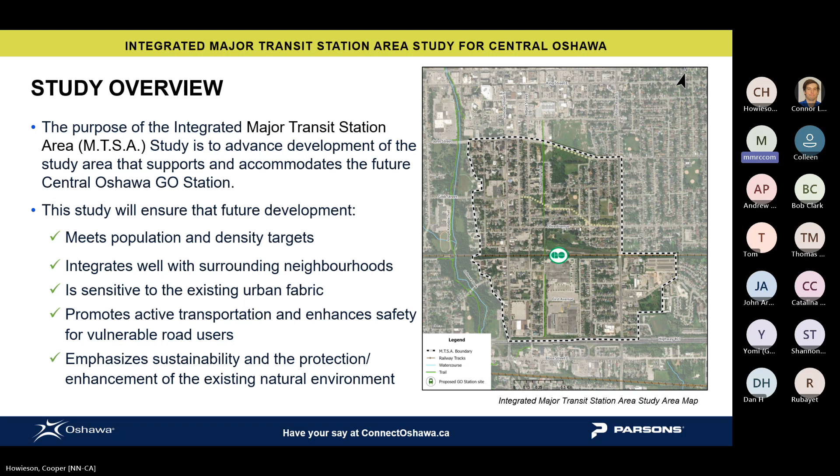The outcome of this study is twofold. We have a master land use and urban design plan that Kieran's going to walk you through in a few slides. Then we have an area specific transportation master plan, which looks at the development traffic that's expected and assigns it to the road network to see where improvements are needed - and not just for cars, but also for active transportation and transit.

We're satisfying a process - it's a paper process where the province has to undertake a class environmental assessment, so we need to follow that process. At the end of all this, the EA goes on public file and there's a 30-day public review period, and you have an opportunity to speak to the city and to the province about what you like and don't like about this plan.

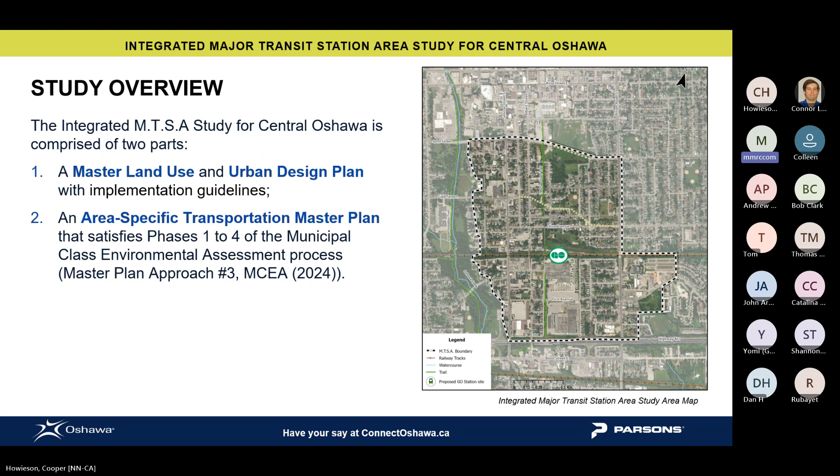A bit of a study timeline - this is where we are, spring of 2024. We're in stage 3, so there have been 2 stages before this. We have one more public information center planned after this, where we will be finalizing the results of the study, hopefully with your input from tonight. Then, as I mentioned, there's a 30-day public review of the environmental assessment master plan report, and eventually things move forward, infrastructure gets built, and development happens.

The purpose of why we're here tonight.

So we're here to talk to you about the land use intensification review and urban design guidelines. We actually have our specialists here tonight, so hopefully that will address some of the concerns that were absent last time. We're going to talk a little bit about First Avenue and Monocton Avenue, which is the roadway that's initially identified for modifications as part of this plan.

Talk about what the options are and how we're going to evaluate that, and also talk about the study timeline, the key dates. We're here to provide an update of the study and the planning process that's been undertaken today, and we're here to listen to your feedback.

I got my fireproof underwear on tonight. I don't know about you, so, but I hope we're all going to be nice and respectful and have a good conversation. Like we said, we understand you look at the map, there's a lot of uncertainty because there's a lot of red and purple splotches, and we're here to kind of walk you through that process.

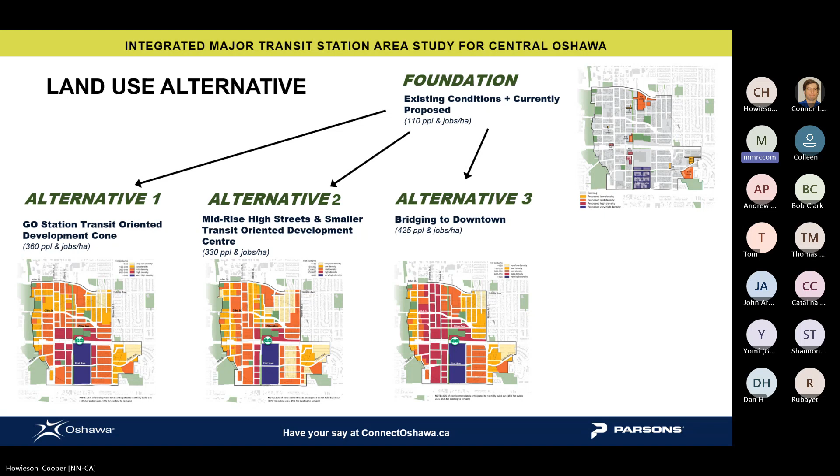It may be a little difficult to read, so I'll summarize. The benchmark starts with the province's request to see a density target around the GO station area, which is about 170 hectares. I want to remind you this is a very large study area, so its absorption is not all one solution, not all high-rise towers. This is about understanding what the target is and building sensitivity towards it.

It's also important to note the proximity issues we took into account during the evaluation, including proximity to the station itself and proximity to the downtown, because there are efforts underway concurrently to revitalize the downtown so it becomes a very important node and growth center in the city.

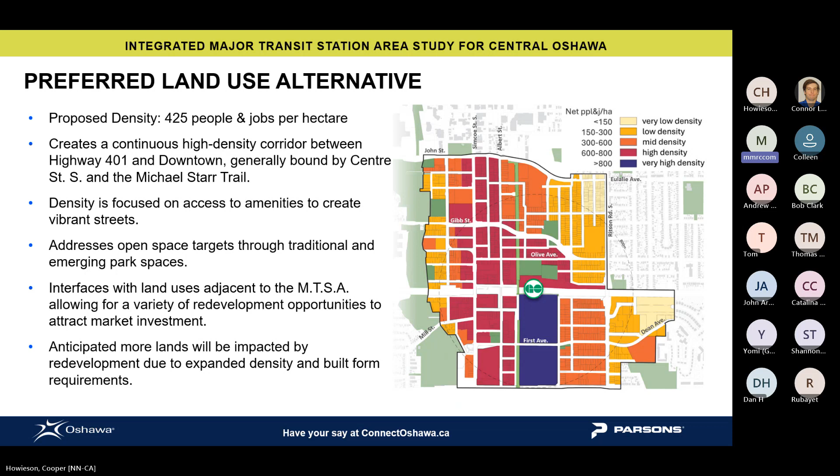The next slide reinforces what's been stated previously, but gets into more detail regarding the land use intensification review itself. It's about understanding the defining preliminary land uses. The city already has land use designations, and what we're looking to do is take those designations and provide further clarity as to how they would adapt and evolve to this particular site as it relates to intensification and mixed use.

Mixed use is a term commonly used in planning that refers to sites not being relegated to one specific use. If you have intensified unit types, like a building with apartments where the ground floor has commercial space, that's a mixed use residential focused building. So the area is really about defining what the variations of mixed use can look like, and this draft report goes into further detail about what can happen, where, and how.

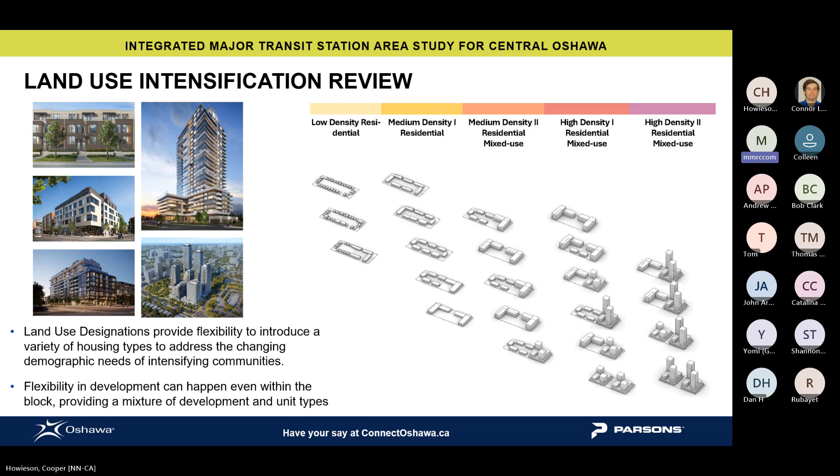Next slide, please. And to do that - this is new, from what you may have seen from PIC 2 - we have a series of urban design guidelines. These guidelines, as we spoke to before, are looking to address issues of block configuration and intensification models that would happen within the existing block structure. Again, this is within an existing part of the city.

We know that these blocks are already serviced by municipal infrastructure. There's no reason to rip it all out - it's more about upgrading it to meet current capacity. Working within the existing block structure is something you wouldn't do in the north of the city.

Also understanding that within the existing block structure, built form will adapt. Again, we're not looking at towers to resolve all density issues - there are lots of different ways we can address density within the site. And understanding that this whole site is actually made up of a series of different block sizes.

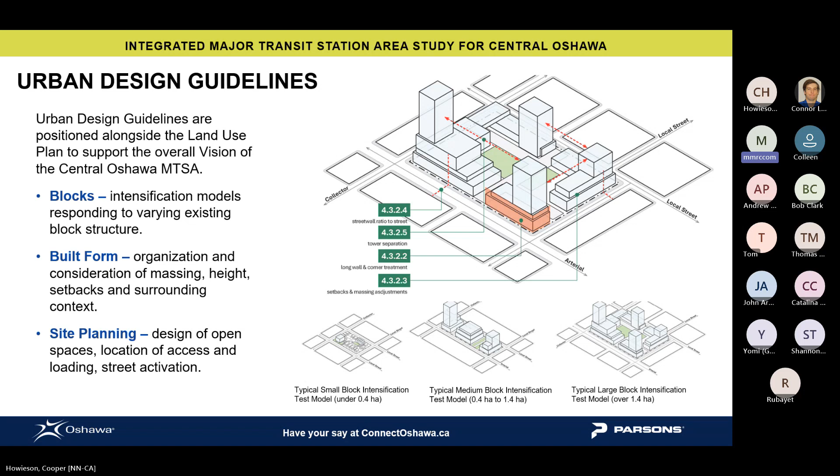So at this early level, what we've identified is three essential block typologies that we can work to as a typical condition, based on size and what you might find in them. Next slide, please.

We'll start very quickly by introducing the one acre block, which is pretty prominent in some parts along and in correlation to Simcoe and Centre, and a little bit further east.

We really do see the smaller block typology to be a very interesting one, and it facilitates opportunities for infill housing within the existing residential fabric. It's a great way to also look at how we preserve some of the landmarks within the area, because there's a more sensitive type of development that can occur in conjunction with preserving landmarks. So we thought it was very important to introduce guidelines which address this particular unique type.

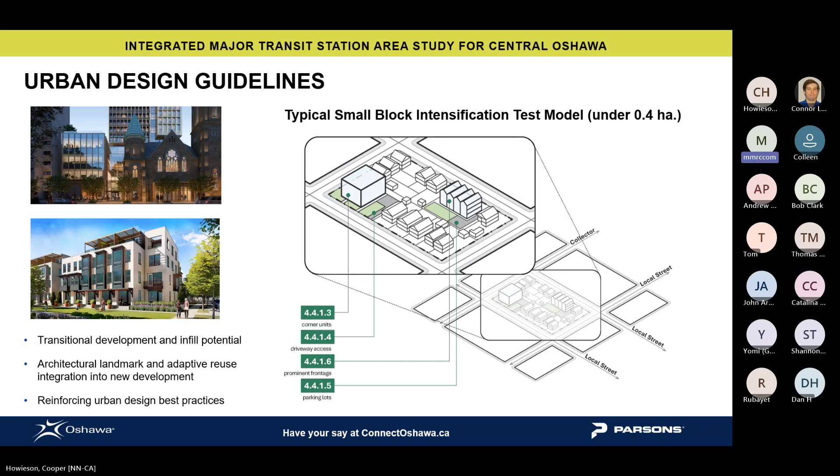What's also interesting is that you have a lot of blocks that are within 0.4 to 1.4 hectares. This is a result of the typical back-to-back single-family homes serviced through municipal streets all around. It's a very interesting condition, very prominent within this area.

What the diagram here starts to suggest is how varying types of buildings can be used to address contextual sensitivity. So you might, at arterial road connections, look to see towers as a potential density solution to meeting the needs of a particular development site. But when we filter down and get closer to local streets, there's a potential to see a more sensitive form of development happen. It's one of the other aspects the guidelines try to highlight.

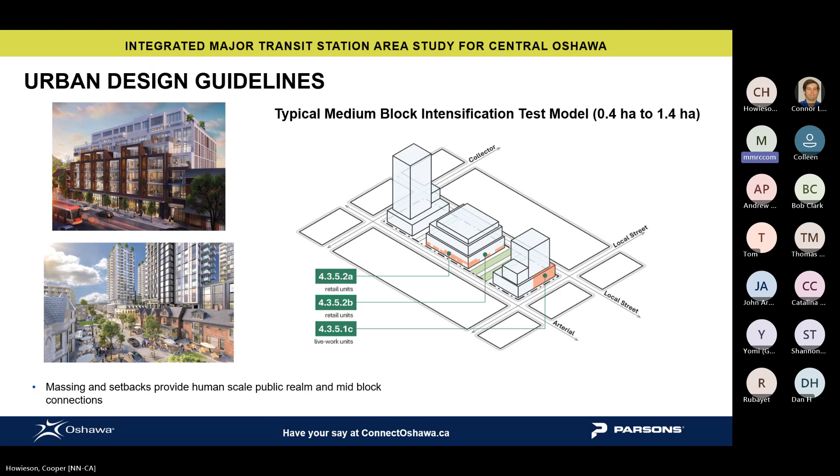And lastly, we have the larger sites. We do have accumulation of larger sites within the study area. These are typically prone in other constituencies as a place for very large towers, an opportunity for development to go gangbusters. But best practices have shown that isn't the way to go, and I don't think it's the way Oshawa would like to see this area develop. So there's ways to integrate sensitivity to that.

Looking at arterial roads where we have those interfaces or frontages, and looking at various forms of density to occur there, understanding that the podium is one level, but you might have setbacks and other architectural tools used to help soften the impact of high-rise development, if a site so chooses to go that way. And understanding that there's an opportunity to tier down as we get into more stable neighborhoods.

The other issue we wanted to highlight, particularly in this configuration, is the fact that we need more porosity. We don't want super blocks, so the guidelines reinforce better public realm. To do that, we also look at larger sites as giving an opportunity to provide public open space, even if it's on private land, which is a very common practice within the GTA today. It's a way for development to give back, particularly in this area where we know there's a deficiency in open space. This is one of several measures that can help mitigate that.

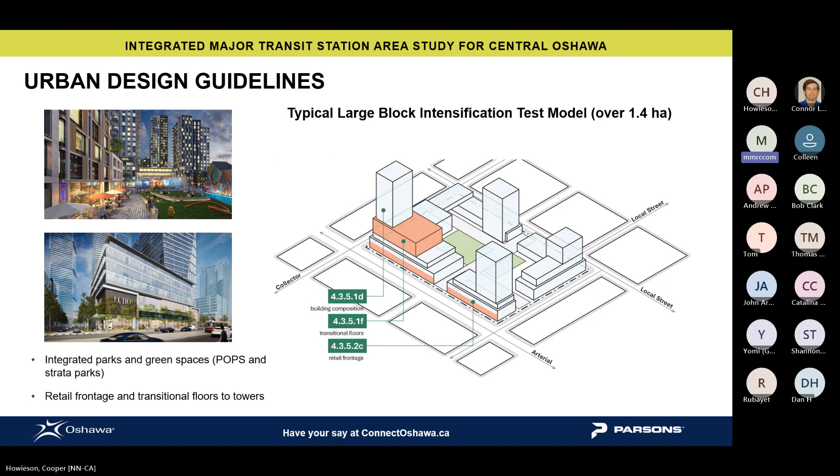Back to me. All right, so we are about halfway through. I'm not going to skip over things, but I'll hit the highlights. A lot of this material, you probably noticed, is on the boards outside.

I'm going to talk about the transportation assessment that's been done. I'll note that the assessment done to date, particularly focused on First Avenue/McNaughton, does not look at full build out of the development. We're looking at about 10 to 20 years out, which is when that portion of the area is expected to develop. It also aligns with the city and region's transportation master plan.

Once you start getting beyond 20 years out, there's a lot of unknowns. There are improvements to the transportation network that nobody's dreamt about yet, changes in travel patterns. I'm holding out that I'm going to get that jetpack one day.

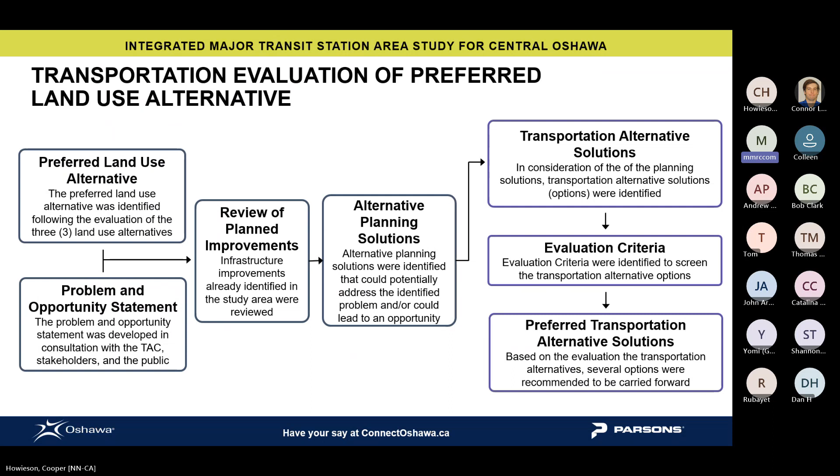Going back to process a bit, we talk about how we evaluate our preferred land use alternative. It really comes down to inputs on the left: the preferred land use alternative that Kieran talked about, the problem and opportunity statement I mentioned, and review of all the planned transportation infrastructure improvements within and beyond the study area. Whether it's the MTO, Metrolinx, Durham Region, or City of Oshawa, that all goes into the hopper. Then outputs in terms of the potential solutions we can explore, how we evaluate them, and then develop a preferred transportation solution.

In terms of alternatives, we basically had 7 rough alternatives. They're mainly focused on the First Avenue/McNaughton corridor because, as mentioned in the past, roads like Simcoe Street and Ritson Road are the region's responsibility, and Metrolinx does the GO station. Option 1 is our baseline, a do-nothing option, which is in there because the provincial EA process requires us to use that as a baseline against all the other alternatives.

For First Avenue/McNaughton itself, we really have 2 alternatives. We can keep it as a 2-lane road and widen it to 4 lanes between Ritson and Simcoe, or we can maintain it as 2 lanes and add active transportation improvements like nicer sidewalks and cycle tracks or cycle lanes. Along with that, there are some operational improvements we can make, which you may have noticed on the roll plans outside, and I'll reference a bit of what those changes might look like. Now let's talk a bit about Albert Street.

It's really in there more as a sensitivity assessment. We know the bridge has been there, and it's been closed for a while now. We can either choose to rebuild it or choose not to rebuild it. And then finally, there are some other localized active transportation improvements that can be made in the area.

I had a good conversation at the beginning about how do we connect First and McNaughton, and bike lanes that basically just begin and end at one end and the other. Where can people go, and how can we connect them to the broader network?

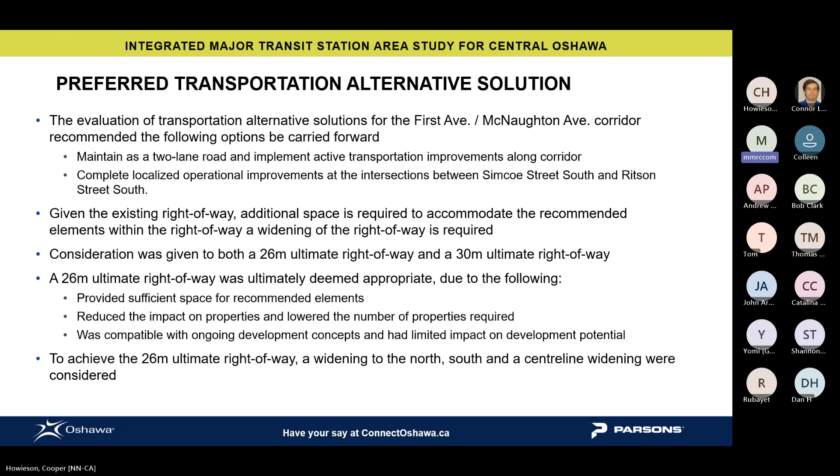And then in order to achieve that 26 or potentially 30-meter ultimate right-of-way, we need to consider how the roadway gets widened. The first thing we did was break the corridor up into 3 segments.

These are fairly logical — I think you'll understand just based on what's out there today. Between Simcoe and Front, there's the Dollarama Mall on the south side and a short block with some houses. In segment 2, we have the old glass plant and the Nob Hill Farms terminal on the north side. Then in segment 3, we get into residential, with houses directly fronting onto the street with driveways, parking, and lawns.

I think you all probably know what First Avenue McNaughton looks like today. The right-of-way I talked about, where we're looking at either a 26 or 30-meter right-of-way — out there today it's 20 meters or less. So we're talking about a 3 to 5 meter widening, potentially on either side or on one side. There's a lot happening in the roadway corridor; we have mature street trees in some areas, which I think would be an important community consideration.

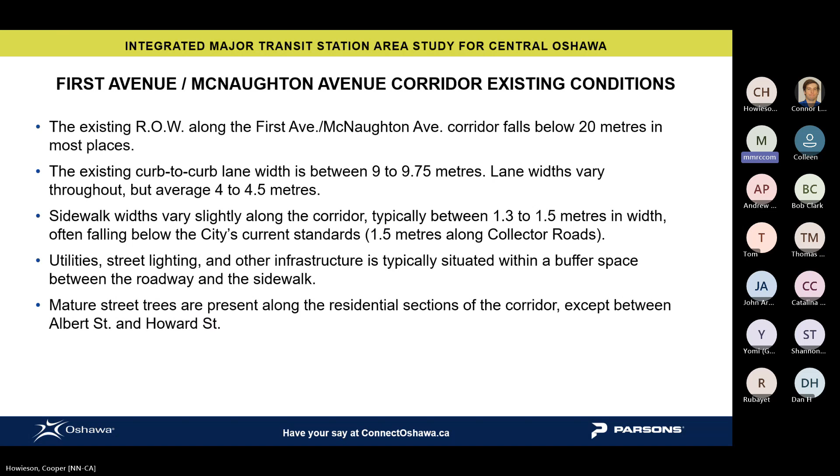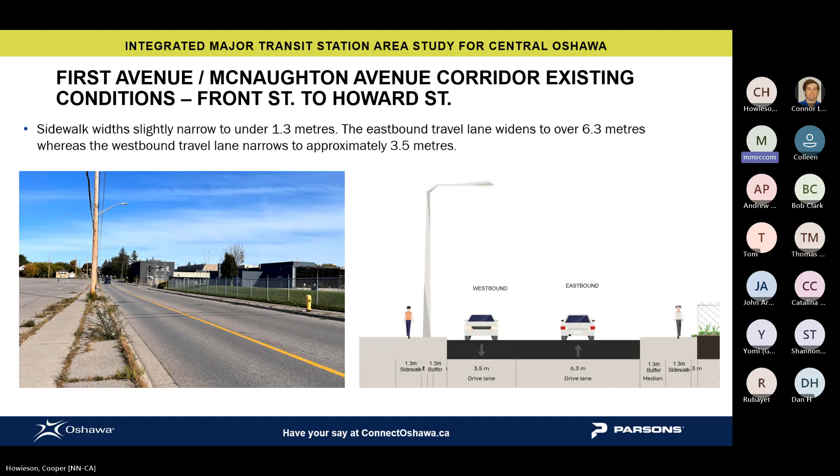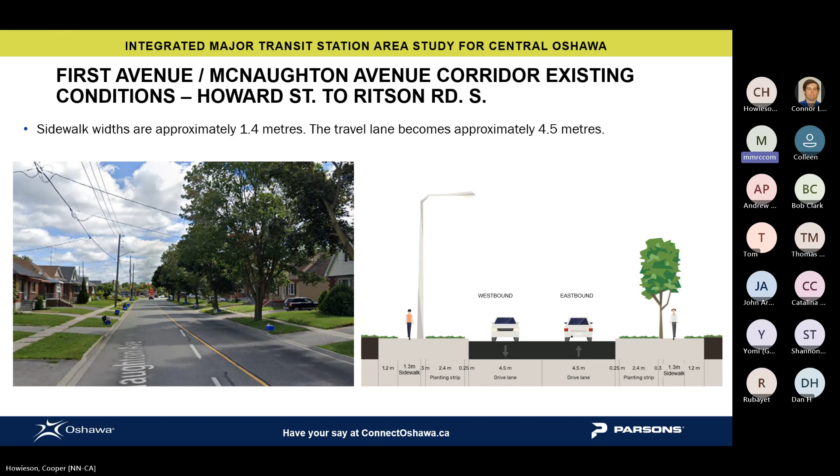Then the design options. I'll refer you to the roll plans out there on the table if you haven't had a chance to review them. I'm not going to go through them on the screen because I can't see them, and you're not going to be able to see them.

We do establish some design criteria. It's intended to create an efficient and safe multimodal transportation network, taking the vision and breaking it down into the specifics of this roadway corridor. Point out the last point, which is very important: the final street design and all road infrastructure has to adhere to provincial and municipal standards. It's going to be a safe street and designed to be universally accessible, meeting the requirements of the Accessibility for Ontarians with Disabilities Act.

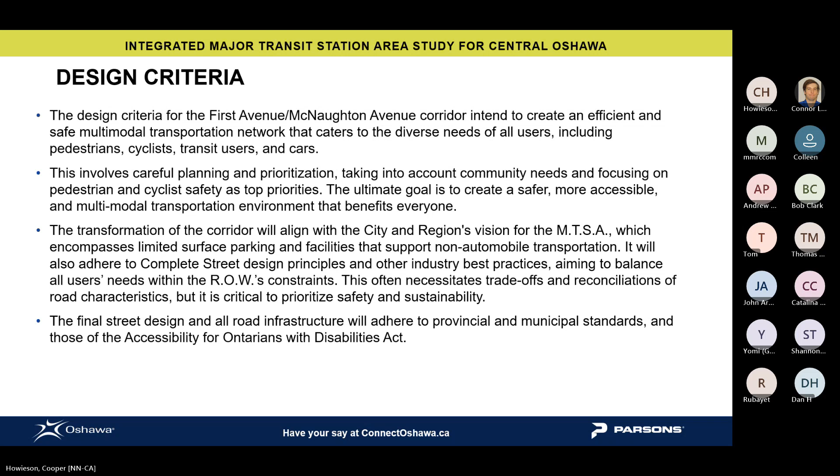We also have design criteria given to us from the city. They have a catalog for what a collector road looks like in terms of how wide traffic lanes should be, how wide turning lanes should be, and whether there's on-street parking, which was not proposed in this case. Same thing with sidewalks and cycling facilities. All that goes into our design options for the corridor.

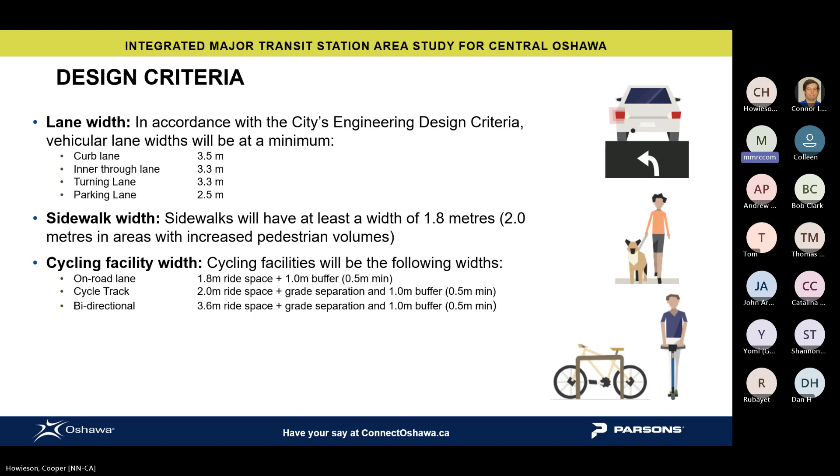We have three options. Option 1 is a fairly conventional design where the cycling facilities are located on road. We would provide a wider buffer, so instead of just a single painted line, there would be a meter-wide buffer giving a little more space. There are probably opportunities for things like flexible bollards or maybe even pin curbs to help provide more separation between cars and cyclists. But this is a very traditional approach.

Option 2 is a more contemporary approach for cycling facilities, and I'm not aware of any street like this east of Toronto. I've worked on a lot of projects with this type of design in Ottawa and other cities. It's a more European design where the cycling facilities are moved off the roadway, raised to the level of the sidewalk, with both horizontal and vertical separation between cyclists and the roadway. This increases safety and reduces conflicts between cyclists and cars, benefiting everybody.

Finally, we have an alternative where we put the cyclists all on one side of the roadway. This saves a bit of space, which is one of the main benefits. It also provides better opportunities for access to sites on the south side.

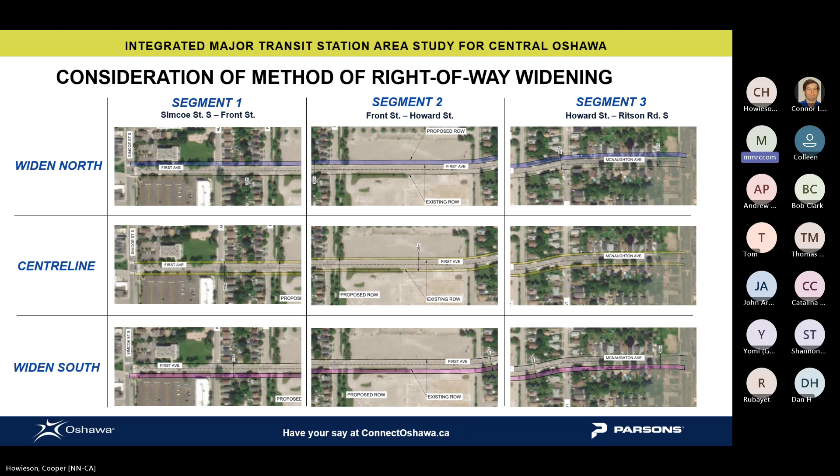In the next slide you can see what we're proposing to do. In the two west segments, basically from Simcoe to Howard Street, the proposed solution is to widen all to the south. We think that's the better solution because that's where we have development properties, such as the glass plant and the Dollarama Mall, which at some point will probably be redeveloped. The city has a better opportunity to acquire property through redevelopment as opposed to having to negotiate and acquire property from a bunch of individual property owners.

And then finally, in the east section, the solution is to minimize the amount of property required on each side and do an equal widening off the center line.

I'm going to point out that the result of this study, and I had a very good conversation with a gentleman before the meeting who has the house right at the corner of McNaughton and Howard, the result of this study is merely the identification of a preferred ultimate right-of-way and design alternative for the roadway. It does not result in any direct change to your property or affect your rights as a property owner to enjoy your property or sell it to another owner.

Just by putting a line on a map, the city does not say, that's ours now. It's yours. The city can acquire it through redevelopment. That's the preferred approach because the city gets it for free. The other approaches are in decreasing level of preference.

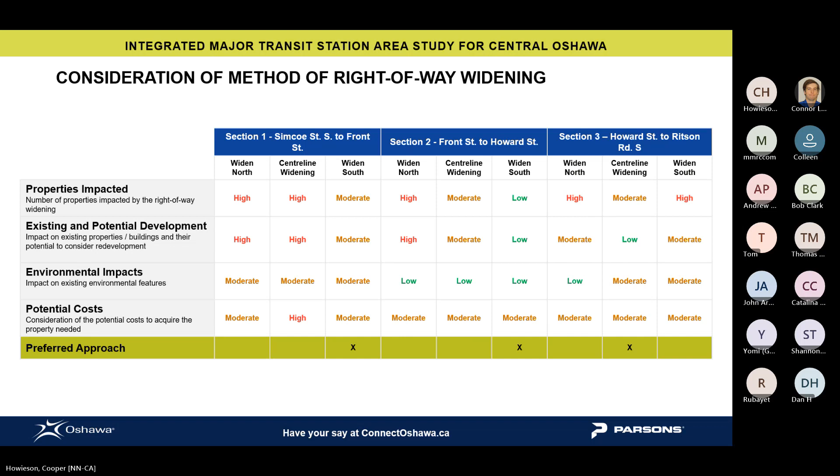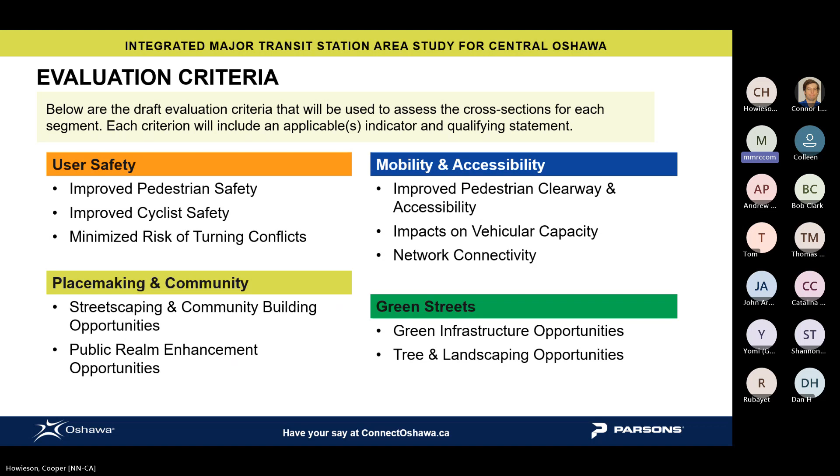I'm going to talk a little bit about the evaluation criteria. So I mentioned we have 3 alternatives. We do not have a final preferred option at this point. This is a key point for your input in terms of what you want the road to look and feel like. So our 4 main areas are user safety, mobility and accessibility, placemaking and community, and green streets. These are the draft evaluation criteria, so these will be finalized after this meeting. And then we'll go away and do our evaluation and come back to you with a preferred alternative.

We do have some ongoing technical studies in the area. Some of these were deferred because we can't go out in the winter to do natural environment surveys, so those are starting soon. Some other technical studies we have to do just look at things like archaeological potential, built heritage and cultural landscapes—do we have some heritage buildings in the corridor? Contamination—we have some old industrial sites along the corridor, so we want to know what might be in the soil underneath the roadway, because if the city digs it up, that soil may have to be trucked away or moved somewhere else. And then finally, geotechnical, which really just goes to how the engineers need to design the pavement based on the type and volume of traffic that's expected.

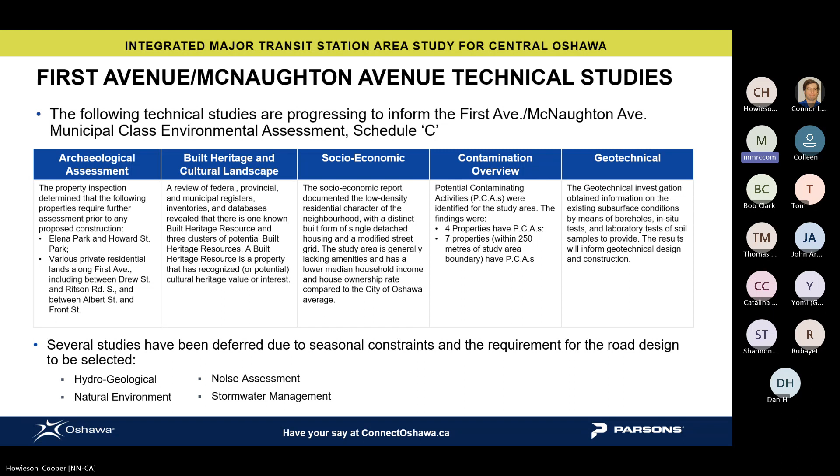As I mentioned, we are following, at least for the transportation part, an environmental assessment process. That is a provincial process, so it has to be filed for a 30-day public review, and you have an opportunity again to tell us your thoughts.

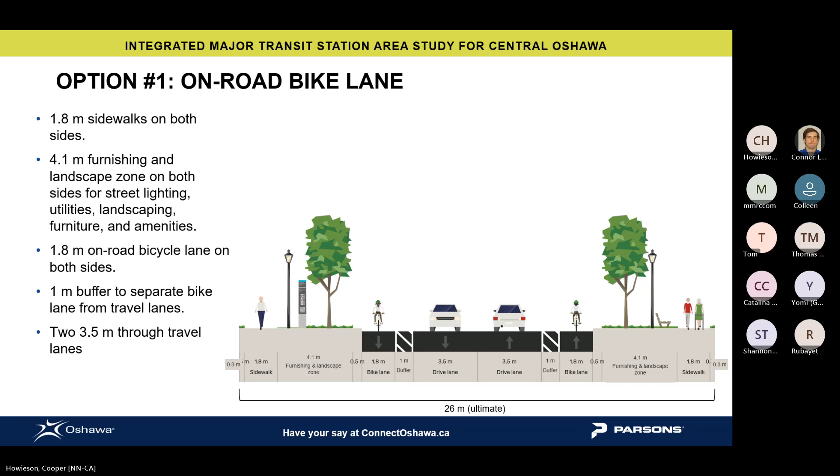Can I switch to continue to First Avenue McNaughton, and can we go to one of the slides where the bike things are there, one of the pictures where you're looking at the roadway, the cross section? Having cycled in Europe, option number one I think exists in Oshawa today, and that's not my choice as a cyclist.

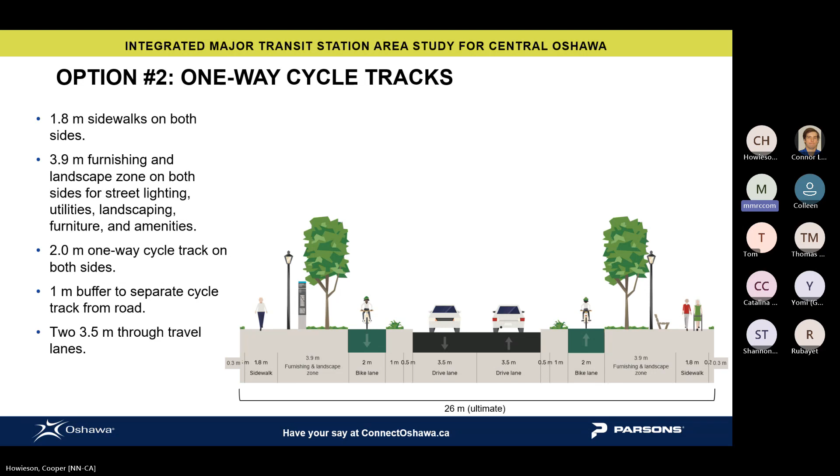Option number two would be, I've cycled in Belgium, they have designated lanes with, now that I see the picture, option number two, some shrubbery there that doesn't have to be maintained by the city with a lawnmower or that kind of thing. If you go to the slide where you have the actual city street picture, any one of them. The existing one before this, yeah, so you have a picture on the left, like that.

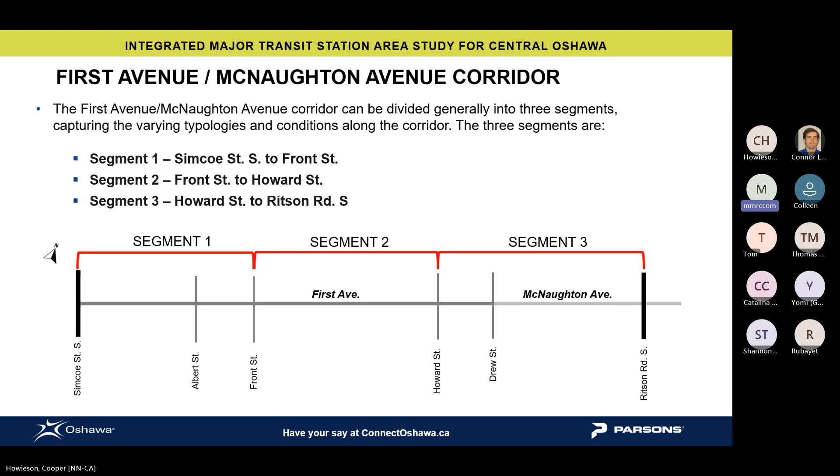Are we going to get rid of the overhead wires on the street, bury them? That is one of those considerations we'd have to fine tune as part of the detailed design, the preliminary design we have to do in the next stage. So the ones we show right now are concept. You'll probably see roll plans to see how it would look on the aerials.

So is this concept, does it have overhead wires? I can't see that clearly. Well, currently it does. We still need streetlights, utilities, servicing, all that needs to be figured out as part of the next stage, which is looking at the details of the design.

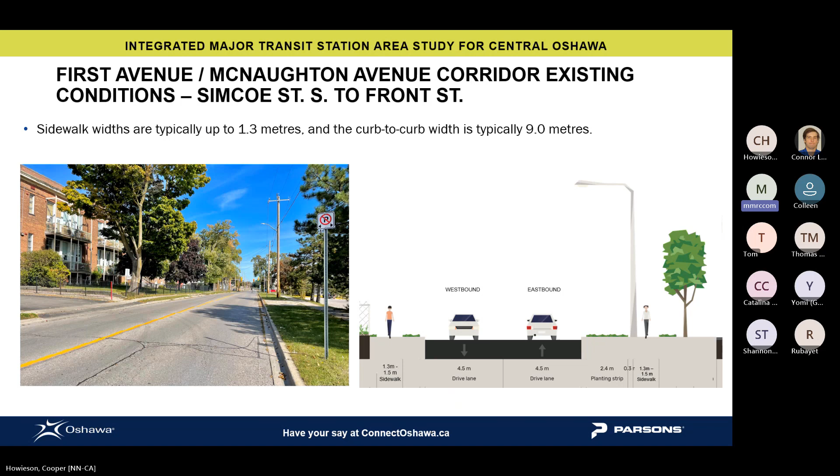Paul, I was asking if he knew whether the current space for the street could incorporate a roundabout at a given intersection, say a stoplight going from Ritson west. I don't think you have two stoplights, just one. I think that's a great question, and one of the considerations we'd have to confirm in terms of the traffic operations of that intersection, whether it's going to be signal, roundabout, or stop control.

The biggest concern is the space required for a roundabout. Considering this is not a greenfield and it's pre-built, we're working with a 26-meter right-of-way, and hopefully, if needed, we go to 30. But a roundabout, I know for a fact, is going to need much more. So the space requirements may be one of those factors we have to consider.

If you were able to put a roundabout, and you're dealing with width of street, you don't have to go straight from Ritson to Simcoe, you can be off because the curve of the roundabout puts you into the lane. But definitely, I think that's part of the next design phase, to look at the details of how things can be accommodated into the design.